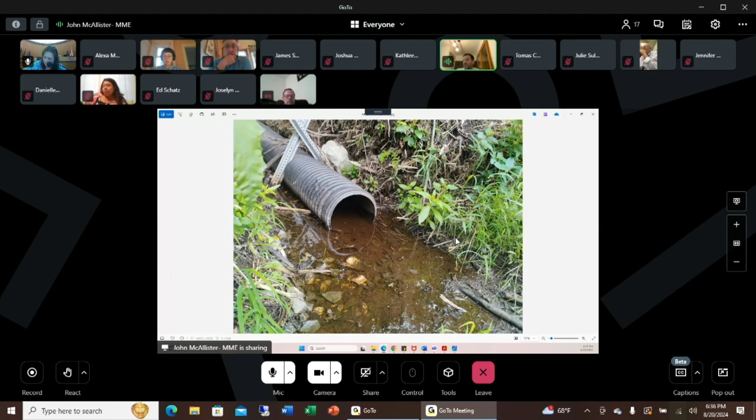The one thing you'll see on this pipe is that there's already a decent amount of silt collecting inside of it. So Patrick and I walked the site, looked at it, and talked about a couple different options. I'll let him discuss that. I'll just say that it is a complicated site - it's actually on private property.

I did do a little digging after our meeting. It looks like there might be a conservation and drainage easement in there, but I'm not sure who has rights to access and do work in that easement area. The long and short of it is that just putting it back as it was is probably very short-sighted, because we're going to be in the same situation as we were last year. I think it's going to fill up pretty quickly.

So I think there are some pretty reasonable modifications that could be made to keep some of the siltation and debris from collecting in there. But that's not really for me to suggest. Again, putting it back right in place, I think, is just setting us up for repeated problems. So maybe making it easier to maintain and keep debris and silt from getting into that pipe. With that, Patrick, I'll pass it over to you for an update from your side.

Yeah, thank you John. I apologize, I wasn't getting any audio on my computer so I switched to a phone. I apologize, I missed the first bit of your presentation. I imagine you told him about our visit - I just heard you say that a solution wouldn't be just putting back the pipe, because it's kind of inviting other problems in the future.

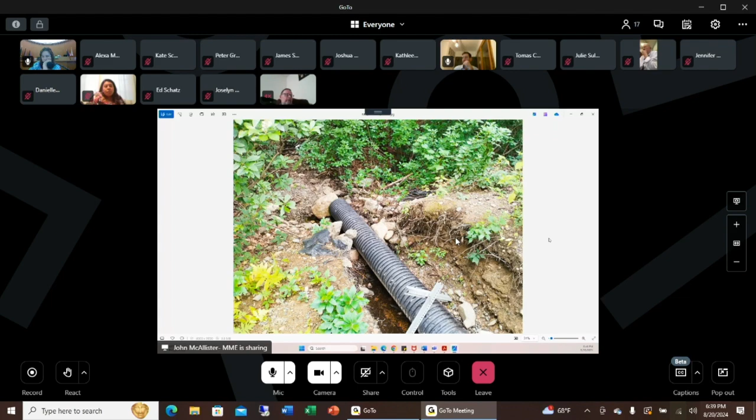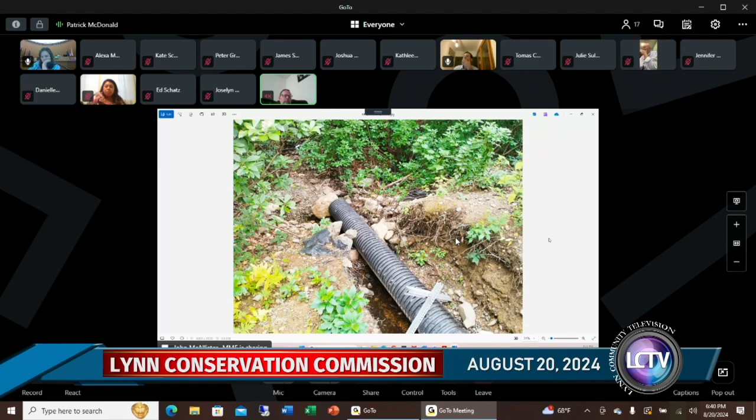with a Vactor truck. But it is operational, and I am still trying to get on site to investigate the rest of the pipe that goes up towards the wetland through number 12 Lookout Terrace. So I'm still in that process. And until I really get into that property, it's kind of difficult for me to say what the solution might be. And I'm hoping that clearing this pipe through Lookout Terrace is going to take a lot of heat off

this area in Lynn in terms of water. I still have a concern about having the water flow out of two outlets, until I know what the elevation of the invert is.

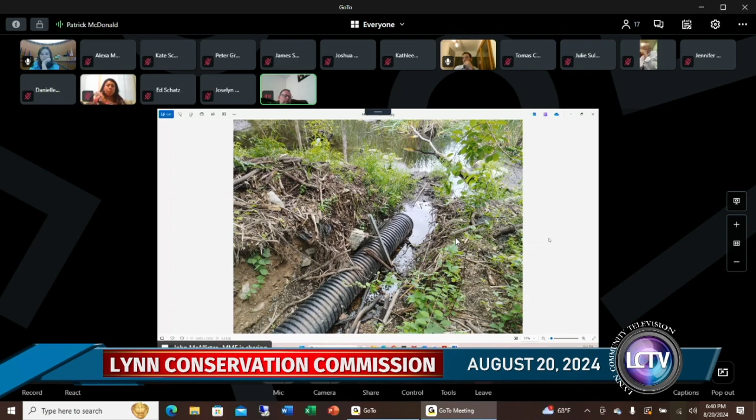Lookout Terrace. It's hard for me to say.

But if you don't mind, let me just show you. Oh, it looks like I'm getting it here. Okay, I apologize. It's only giving me one option to share my entire screen. Okay, so here it is.

So if you can see this cursor, probably not very well. This area down in the south end of this map is the embankment where the pipe is.

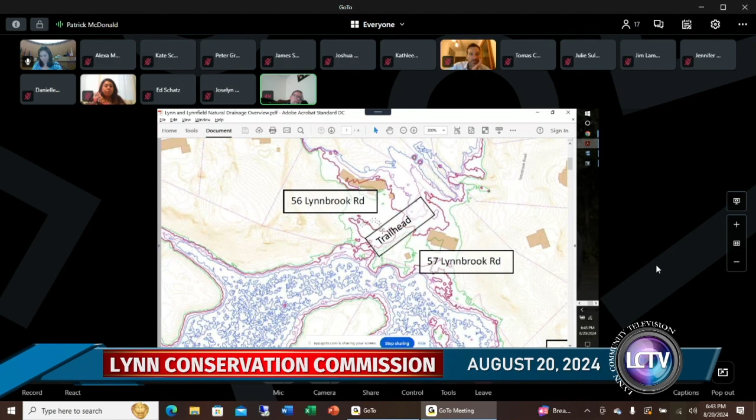It also goes through the property of Lookout Terrace and into number 10 Lookout Terrace. It goes into 57 Lynnbrook Road, the trailhead that we have going into Lynn Woods on the Lynnfield side, as well as 56 Lynnbrook Road. And it actually inundated this septic system at a cost of $50,000 in order to replace it.

It also then flows all the way through this little notch, which then flows downstream to Ledge Road. So, sorry, this notch right here. And it flows down through Ledge Road, and we have a pipe. There's a town pipe right here that carries the water down over to Ledge Road and down Ledge Road out onto Salem Street. If that pipe gets over top, then this home gets flooded.

So I only want to say that because I apologize. I missed John's initial presentation, and maybe he talked about that, but I really just wanted to show the commission that how interconnected this entire system is.

Moving on to what I had done with number 12 Lookout Terrace. This is from number 10 Lookout Terrace, looking back at one of the pipes in the lower reservoir area of open water before it goes into a pipe which travels through number 10. And so you can see by the damage here that it's not going to be an easy solution, but I'm still trying to get in there and find out the condition of this pipe.

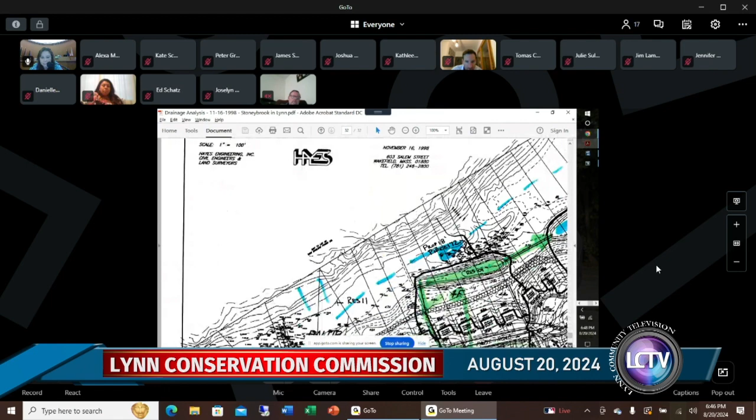This is the earthen berm, and this lot right here is that actually says 42A when you zoom in on it on a higher resolution image. So back to this paragraph.

A topographic survey of this area and the area up to the town line revealed that very little storage in terms of depth could be realized without causing stormwater to back up into the town of Lynnfield for even frequent storm events, which appears to be a 2-year storm according to their report. They did calculations for 2-year storms, 10-year storms, and 100-year storm events.

So it illustrates the potential flooding back into Lynnfield, even assuming if the pipe was open.

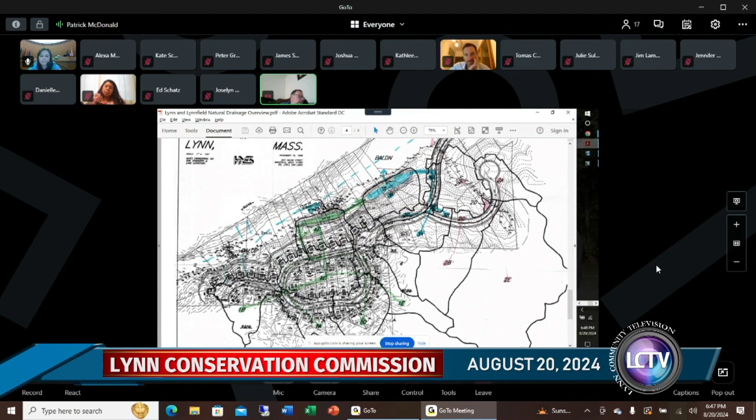So I guess what I'd like to propose is that right now the berm has a large breach through it, and to my knowledge, I haven't heard of any flooding downstream because of this opening. Because I'm still working on investigating this other pipe that pipes Cedar Brook, if we would allow that former breach to stay as it is for now, the City of Lynn and myself can kind of monitor what that looks like.

So I have not been on that site until John McAllister and I met, and I don't intend to go out there without being accompanied by somebody from the city or Lynn Water and Sewer, just in all transparency and fairness to you guys.

So that's kind of where it is, and I'll keep updating the commission as to what our progress is. And as I had mentioned before, I have some very sincere interest from National Grid in helping to prevent flooding and beaver dams in this area.

Knowing that that is kind of something that could work out in both of our favors in the future, I'd like to play that out as well. So that's kind of it for me for the information that I've got so far.

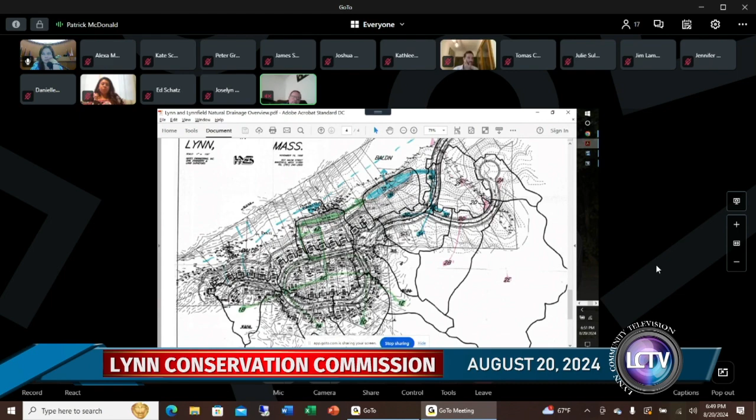Does anybody have any questions?

I think for me, my question is more around, I guess, timeline. Do we have like a timeline for anything really? I know, like you said about, I guess, yeah, go ahead.

Yeah, so that's the real difficult question, and I respect that. That's fine to ask that. I can't really give you an answer, and not because I'm trying to avoid anything. It's because it's much

And perhaps John, you spoke to this. It's a much bigger picture, and so to formulate a timeline for whatever the solution is still difficult for me because we don't have all the answers. And part of the answer is going through that property on Lookout Terrace.

And that's a big component. And I haven't been able to get into it. I don't know the condition of the pipe. It may need to be replaced. So it's a whole set of other issues that take time.

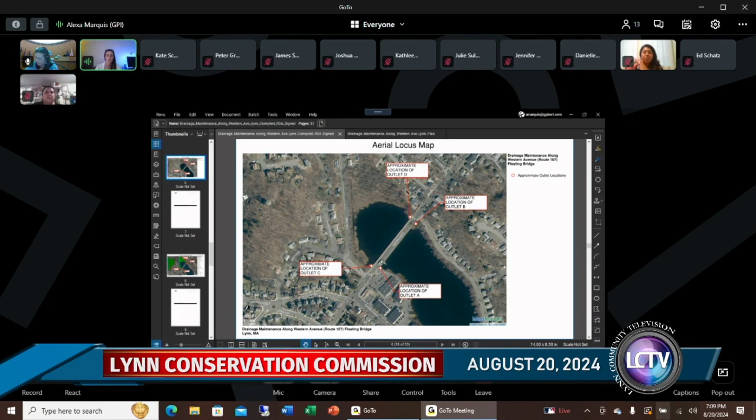That way, anything that is cleaned out of these outlets doesn't get into the waterway. So what the project is planning to do at outlet A is we're going to be jetting with a hydrojet all of the 4 outlets so that we can get flow back through them, as well as cleaning out the catch basins. This is a picture of outlet A, located adjacent to the parking lot plaza.

Here's another overhead picture, and you can see how erosion and any type of rainfall is kind of creeping in over here during high precipitation events.

This is outlet B. Again, we have a lot of sedimentation buildup with some vegetation. Here's another image. This one would require clearing and grubbing just so that we can get that sedimentation out.

This is outlet C. There's an established ditch line here already, but the problem is that it's still a little overgrown and there is some sedimentation buildup. Here's another picture of outfall C. The project is trying to reestablish this ditch line and then also hydrojet the drainage pipe and then the outlet.

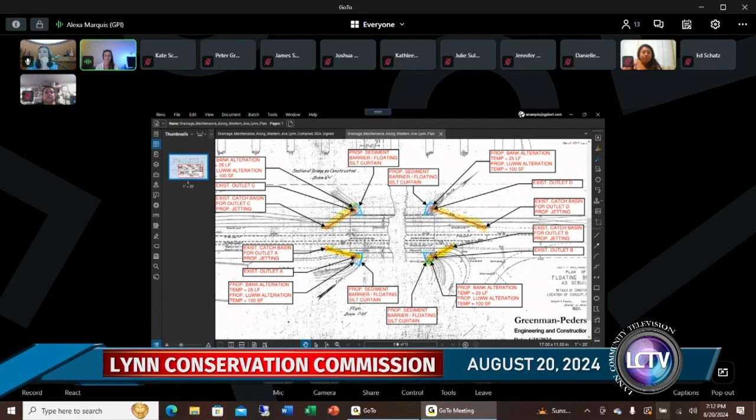I'd like to make a comment and then a question, just to let the members know that because the project is proposed by Mass DOT, it's exempt from local bylaws, so there's no 25 or 30-foot no-disturb zone involved in this process. My question is, Alexa, I've been down there and seen the drains in the area. What I wasn't sure of was whether these drains are just collecting street runoff from the catch basins, or running from the higher, north side to the south side of the pond, collecting flow.

I believe the majority is coming from Buchanan Bridge and the roadway. However, I don't know how far up in elevation it does catch, but that's something I can look into. Are they through pipes? Do you know that, or is that kind of what we're trying to figure out?

Do they run from one side of the pond to the other, and then the catch basins feed into them? I'm wondering what the impact will be if that is the case—once these are cleared out, how low the elevation will go on the north side of the pond, and how much impact that would have.

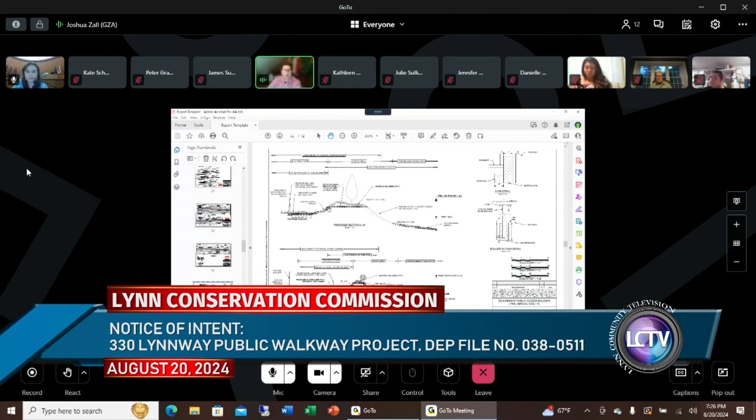As part of the Chapter 91 process of their review, they wanted to maintain sight lines, and they were very adamant about maintaining sight lines from the walkway so that pedestrians walking along the path could look out into the harbor. As a result of that, the berm is planned to be taken down to elevation 11 across the board to match the top of the proposed retaining wall. But in the area here, where there's no retaining wall, obviously it's just going to be a removal of the top portion of that berm.

And then as we transition through, there will be minimal impacts. They're likely to use road boxes or other sheeting to limit the impact to the berm itself as they're excavating to install the concrete wall. And then similarly, as we move north, same thing, some sort of sheeting or temporary road box.

Pull out the existing concrete block retaining wall, limited amount of the revetment so that they can install the concrete wall. And the pavement is going to be pervious, you said, and in your opinion, would there be any incremental loss of flood storage on the site? I don't believe so. For the most part, we're maintaining a similar elevation of the walkway based on the existing grade. The area is prone to flooding as it is, and really we're not changing all that much from a flood capacity or flood storage on the site.

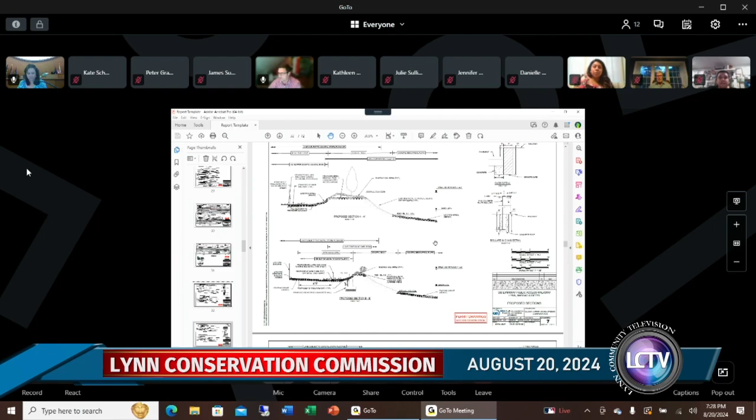Any further questions, comments? Any motions? Jamie, we have nobody online or anything, right? Always forget that. On comments, there's nobody waiting online. Nobody. Okay, I can make the motion to

Issue a standard order of conditions. I can second it. Second? Danielle, thank you? Danielle? All those in favor? Aye. Thank you. Motion passes.

Thank you very much, Commission members. Have a great evening. You too. Thanks. You as well.

Okay, next on the agenda is the notice of intent on Hanson Street, and they do have a DEP file number. I just didn't have it at the time of the agenda, and I'm not sure who's going to present.

Hi, Jamie. Kate Schassler from AECOM, representing the MWRA. I'll be presenting along with Peter Grasso. So if you could allow me to screen share, we'll both be speaking. All set. Awesome. Okay.

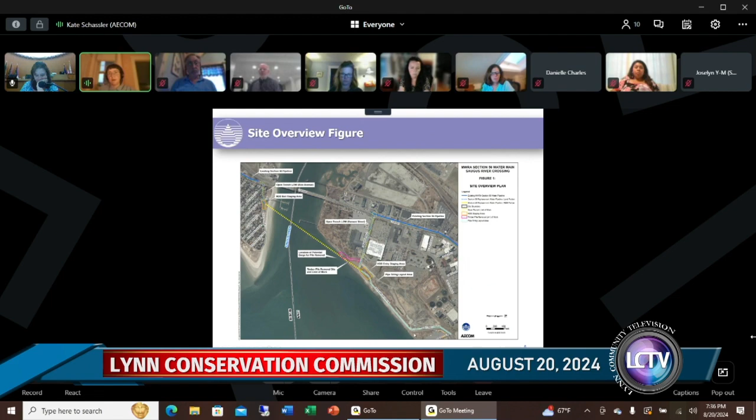Briefly, as I mentioned, horizontal directional drilling is a trenchless method for pipeline installation. For the majority of its length, the pipeline beneath the Saugus River will be 40 feet below the seafloor.

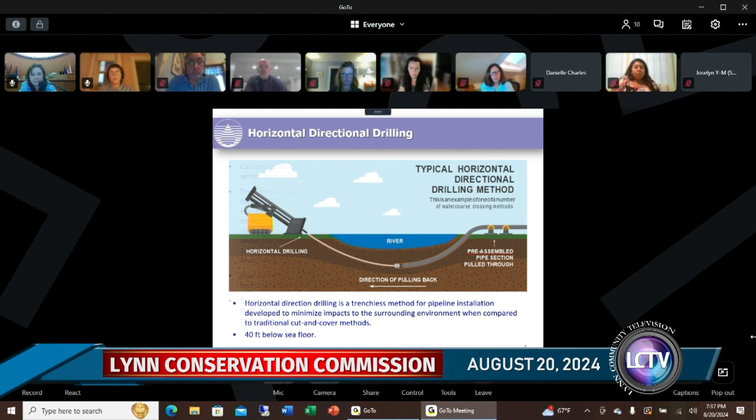So to break it down a bit further, there's 4 major components to this project: the cut and cover pipeline installation within Hanson Street, and then the trenchless installation of 2,800 linear feet of 30-inch diameter pipeline underneath the Saugus River.

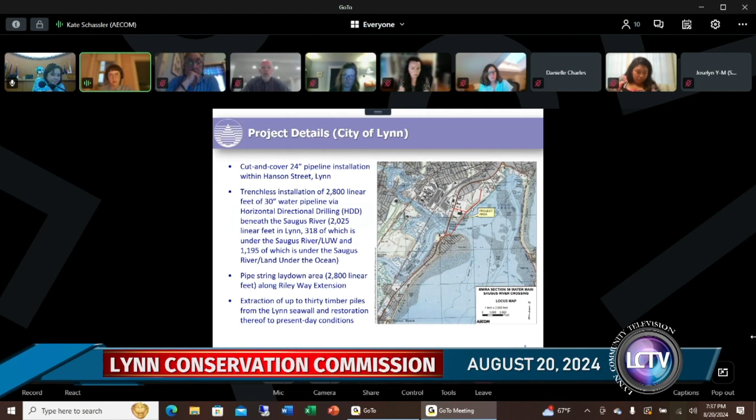Additionally, to facilitate the HDD, we need a pipe string laydown area, which is the length of the pipe, and that would go along Riley Way Extension, a bit to the north of Hanson Street. And lastly, the extraction of up to 30 timber piles from the Lynn seawall, and the subsequent restoration thereof to present-day conditions. Again, more on that in a bit.

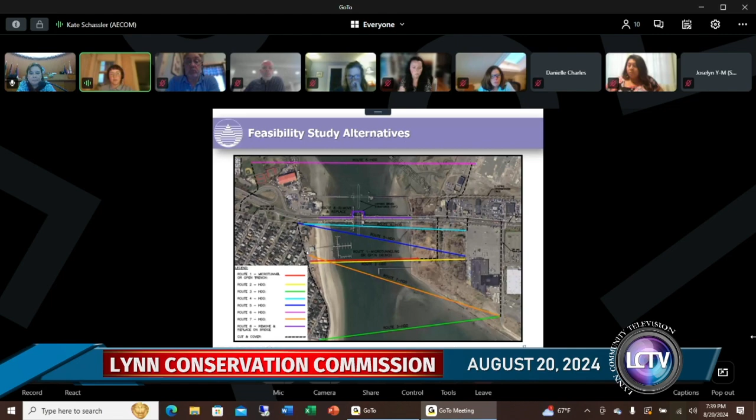We did not put in the NOI a request for an exemption on the 25-foot no build zone, but we will be requesting that verbally in this call. And I'm happy to provide that in writing if the commission requests.

To talk through the performance standards, I'll go through these because there's a lot here, but happy to come back and discuss in more detail. There are none for land subject to coastal storm flowage or coastal beach. The excavation is limited to all that is required for the timber pile removal. We'll be excavating the material and stockpiling it on site to be replaced immediately following removal. We'll install sedimentation and erosion control measures on site.

And then we have a— oh, Jen, did you need to say something? I was just noticing Jamie has her hand up, so I thought Jamie might have a question. Of course. I think it just went up, yeah.

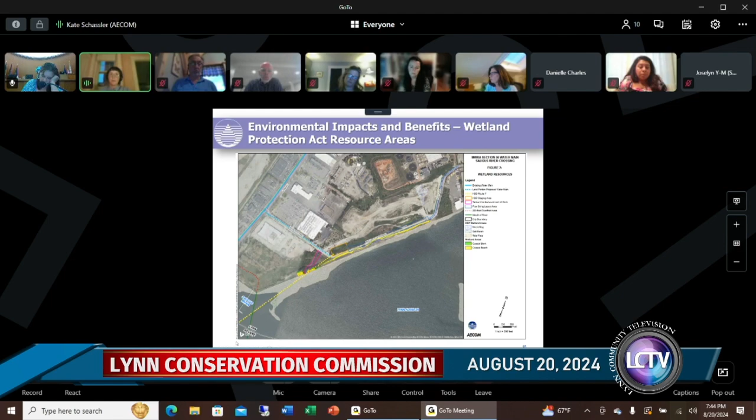This figure shows the locations of the wetland resource areas in the vicinity of the project. Here's Hanson Street, here's the route we'll need to use to access the timber piles, which will be removed over here, and then the staging area for the HDD entry, and the pipe string laydown area that goes down Riley Way Extension and on to Riley Way. This shows the extent of land subject to coastal storm flowage.

Okay, so to touch on impact minimization, I didn't mention this yet, but the only structures being proposed by this project are manholes that will be at grade within the existing roadway. We're not proposing any above grade structures.

The HDD, as I mentioned, also minimizes environmental impacts to the Saugus River and resource areas. Additionally, the MWRA will continue to work with community and stakeholders to minimize traffic and seasonal impacts.

For impact mitigation, we have a traffic management plan that will maintain access to emergency services. The HDD work itself is restricted to the off-season. The same sedimentation and erosion control measures, frac-out management plan, and a waste and trash management plan will be implemented. All refueling will occur away from resource areas, and dust mitigation will take place in the form of watering.

So in addition to this order of conditions we are requesting from the Lynn Conservation Commission, we will also be going before the City of Lynn Highway Engineering Department for a street opening permit for the work on Hanson Street.

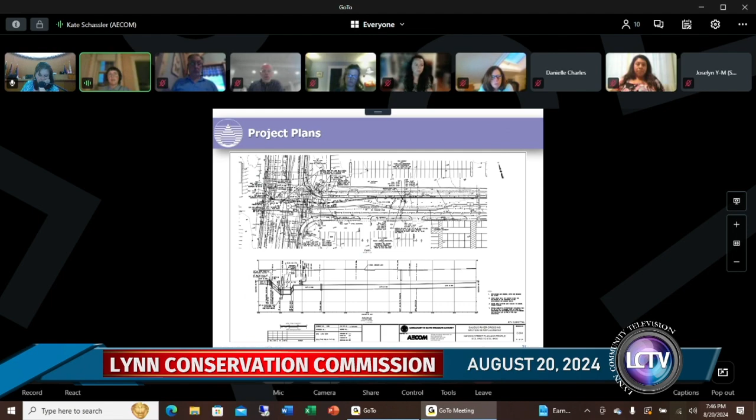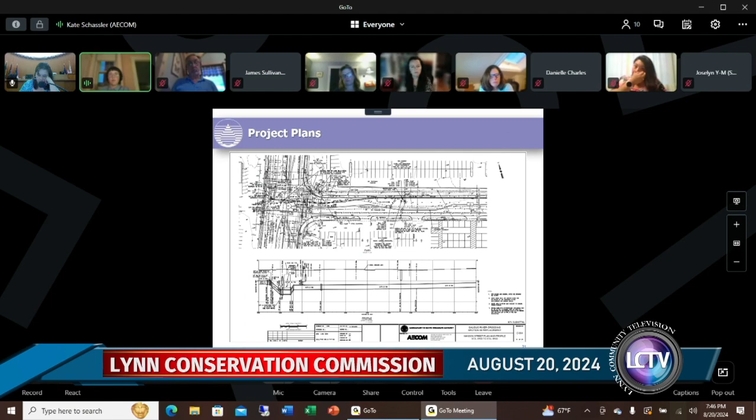And then to wrap things up, I'm going to quickly go through the project plans. Here's the intersection of Lynnway and Hanson Street. Our pipeline starts in the intersection, then moves to the north side of the street and continues along the north side. Once we get closer to the shoreline, it clips towards the HDD pathway and ties in there.

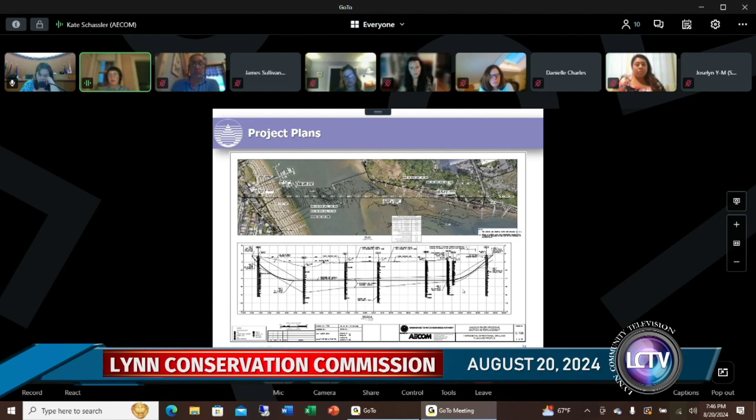This plan shows the profile of the HDD pathway going underneath the Saugus River, and you can see how deep it is beneath the river bed itself at all locations except the entry and exit locations. There's the staging area, the pipe string laydown area along Riley Way Extension, and the timber pile removal.

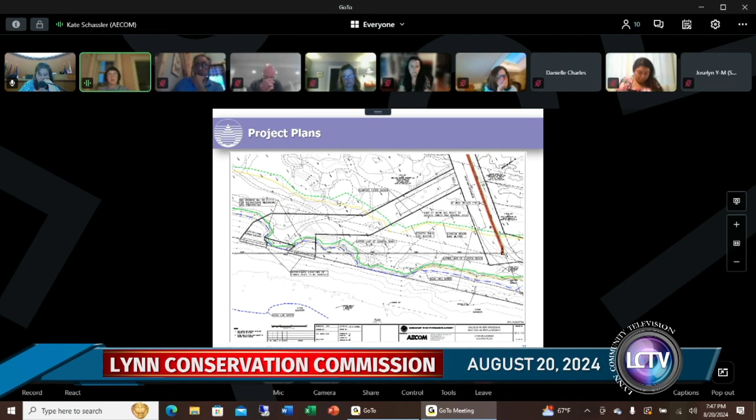There are two locations because the vertical piles, as you can see, will intersect with the bore path here. But over here, the battered piles are at an angle, so we need to remove them there due to their assumed depth of 60 feet, which the contractor will verify on site before commencing removal, as they will intersect with the bore path in approximately this location.

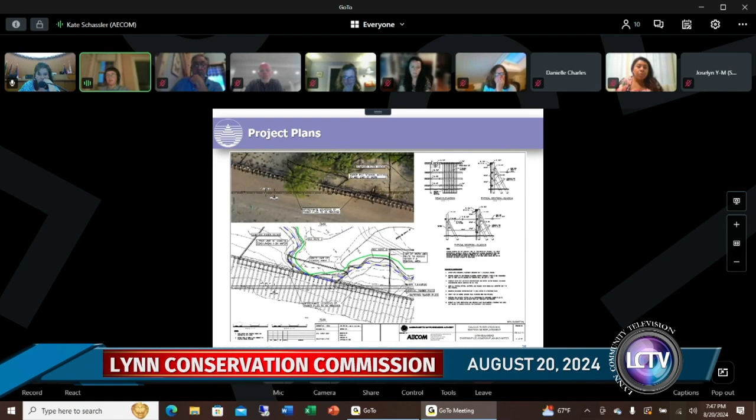A bit closer view, with details that show the seawall. And that's all we have, and we will take questions as the commission has them.

I do have one question, and that is, could you describe the process where the soil would be collected on the shore, exactly how long the storage of the soil will be there, and exactly what the extent of that pile would be and what the plans are. I know you commented on that, but if you could just elaborate a little on that.

Sure, I'm Jim Sullivan with AECOM, the project manager for the design. The horizontal directional drill process is actually a multi-pass process, and it occurs from both ends, Lynn and Revere, so roughly half the total excavated volume would be in each portal. It is a containerized process. It's not actually soil because it needs drilling fluid, so it has to stay in a container. It does get tested and then removed off site. It's assumed to be inert because it's geologic marine clays mixed with the driller's bentonite, but it will be containerized, tested, removed off site, and disposed of in accordance with applicable rules, regulations, and laws. Hopefully it's good for landfill cover somewhere, but if not, it'll go somewhere else that's lawful and approved based on its characterization.